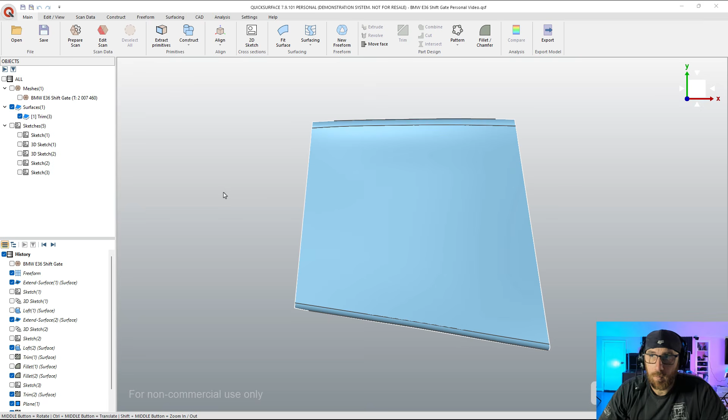The intent here for the user is to redesign a part that's no longer available for 3D printing. So we're going to focus our attention solely on the general shape, as well as this middle piece. The main reason I want to focus on that is because there are some challenges associated with it.

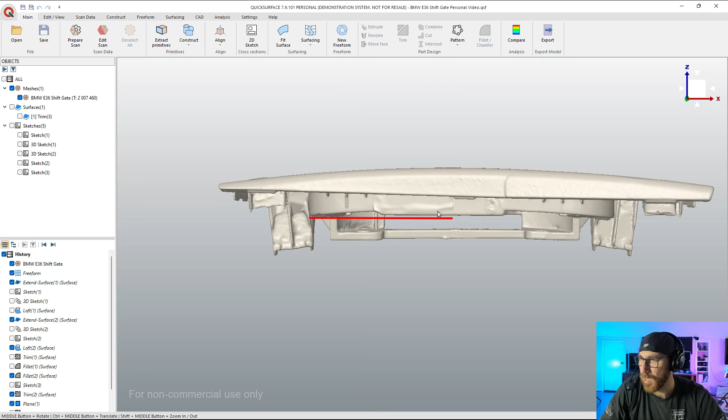This section here, where the two bolt holes are, that's actually fairly flat. But this other section, it's kind of hard to tell - this section is flat or planar, while this section right here is actually curved, except for this little bump out right here.

I want to talk about how to go about this, keeping in mind that this part is injection molded, so it has draft on everything. We're not going to be following draft because it's designed for 3D printing, or that's the intent here.

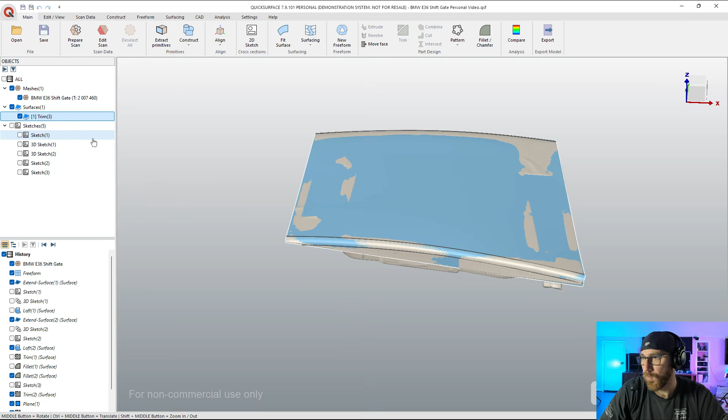So what we're going to do is take the surface we created in the first video, which is an approximation of the geometry. There are some areas where I didn't stick true to the shape.

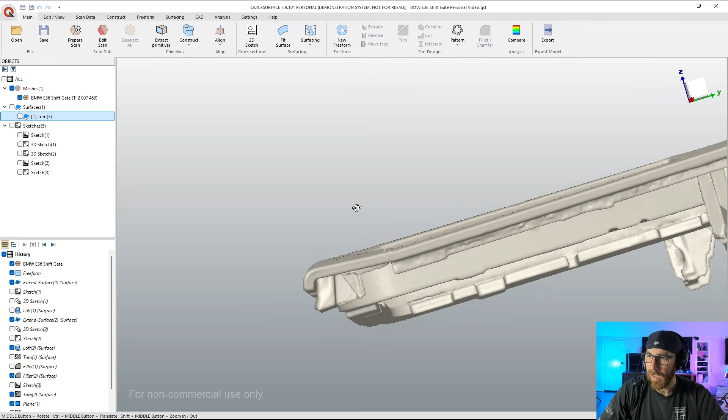For example, if you look here on this side, it's a fairly consistent shape on the edge where the shifter boot goes, but this section right here has a bit more of a compound curve. To get this accurately, we would need to go back into the freeform model, divide it up more, and pull it down into those areas.

You can certainly spend more time getting it more accurate. For our purposes, I don't feel like that's really needed - it's close enough for what we need to do.

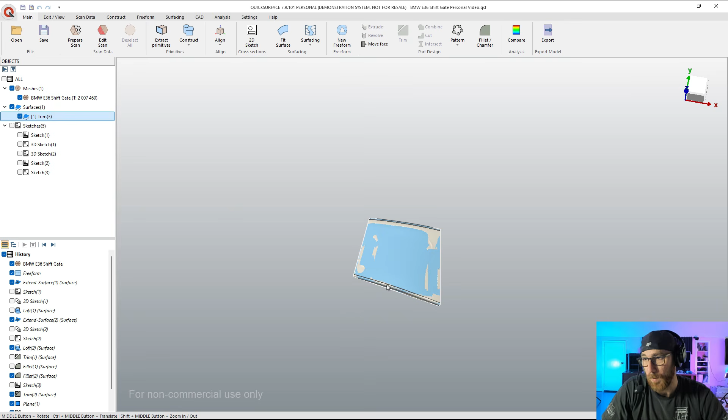The next step in this process, when trying to figure out how to design a part to replace this, we always have to keep the manufacture method in mind, because designing for injection molding is very different than designing for 3D printing.

There are going to be restrictions depending on the type of 3D printing. If this is FDM, for example, then we have to worry about supports. If it's like an SLS process, or essentially a self-supporting process where we don't need to worry about supports, that gives us a bit more freedom.

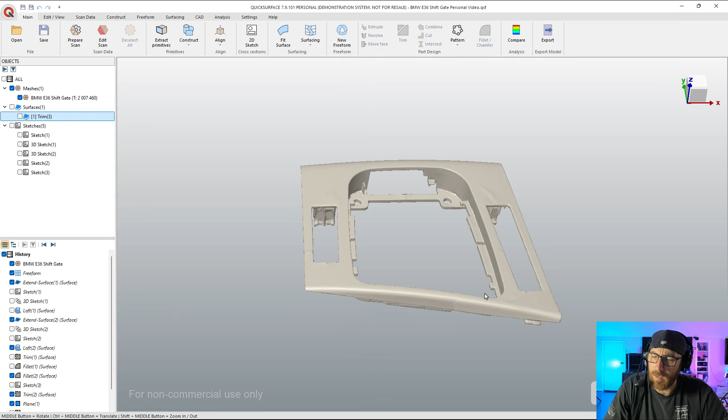If it's a liquid-based process, an SLA process, we do have to worry about supports and removal, but that's a bit different and not something we're really going to design a part like this for, mainly because that requires having vertical supports that hang it at an angle, and a lot of that's done in the slicer.

So what we're going to focus our attention on is the geometry, keeping in mind that it is for 3D printing, but there are nuances there that you need to keep in mind.

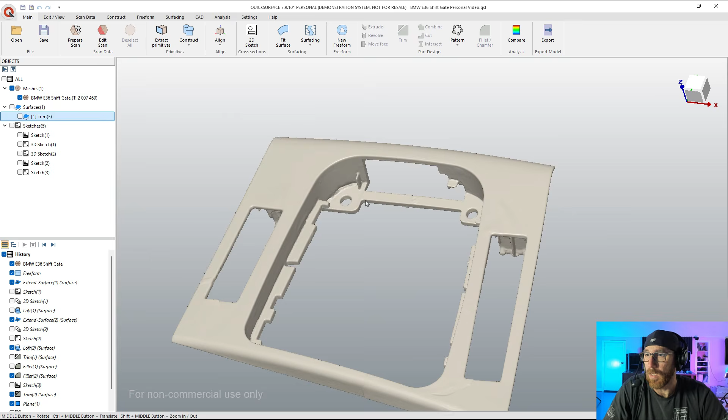In QuickSurface Personal, there are a couple of approaches we could take here. One approach would be to try something like a fit surface. For example, if we use the magic wand to grab the geometry here and create a fit surface, in some instances you'll notice it created this sort of big bubble shape.

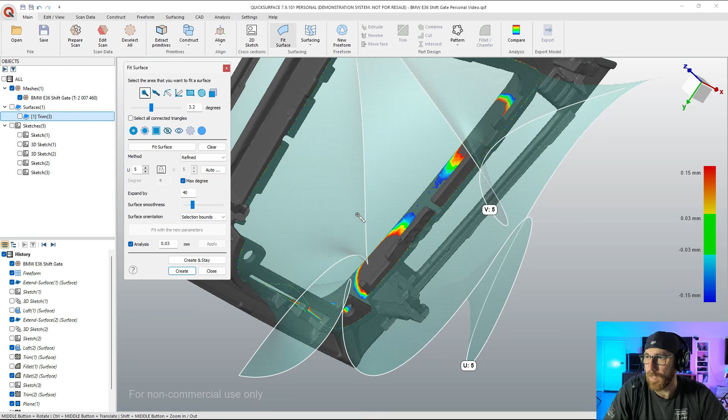What we'd be interested in is the area - let's turn on analysis - where it touches the geometry. You can see it touches in a few places. It's not super accurate, but this is one approach we can take. Sometimes it works, sometimes it doesn't.

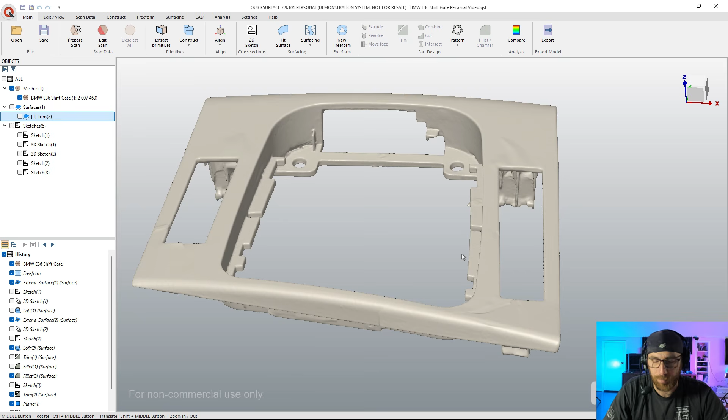The second thing we could do is, if this is truly a prismatic type shape, we could simply go with creating the shape from this top-down view and extruding it to get our shape that way. So that's another way we could do it.

Typically what we would do is use a 2D sketch, pull this up until it's cutting through the geometry - find a position where it's cutting through everything, so maybe somewhere around there. And then we could extrapolate from there.

So what I'm going to do in this video is approach it both ways, just so that we have the information.

So that way we can talk about it.

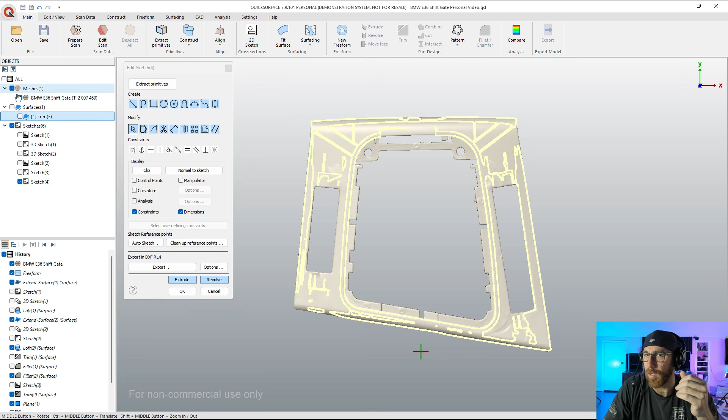So this first way, if we're trying to do an extrude, keep in mind that the actual part is molded and drafted, so we're not going to exactly replicate that. We have to make some design decisions. If it's drafted in an extreme manner, textured with 5 degrees or more, we have to shoot for the middle and decide where we want to go.

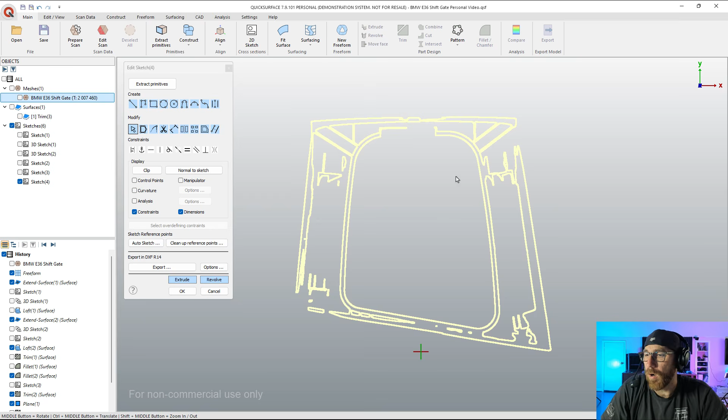For our purposes, what I'm going to do is grab the inside edge, not the outside, just because there's not a whole lot of data. We've got these little mount pieces and things like that.

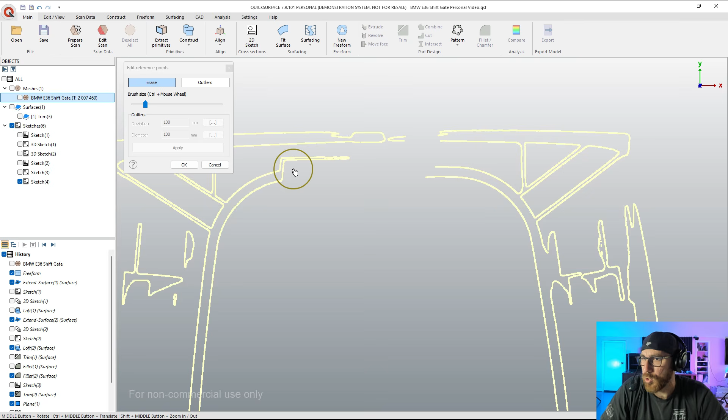So the way we're going to start this is to clean up reference points. This allows us to come in and clear out some of this geometry, which makes the selection process easier, especially if you're using something like Pro, where you've got Sketch Assist, essentially an auto sketch tool. This can be really helpful to clean up the selection process.

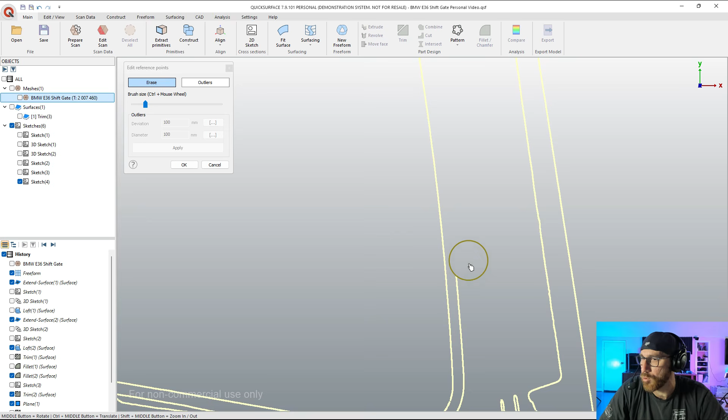Because when we're trying to select this to extract some geometry, we don't really have a great way — well, I shouldn't say we don't have a great way, but it's not as easy to move and pan around the screen and just keep the stuff that we want.

So oftentimes you have to hold down a shortcut key to temporarily disable the selection process, and then if you're also holding down Shift and Control to pan the view to an area where you can get to the rest of the geometry, it becomes a much bigger challenge. I think it's harder to manipulate and manage.

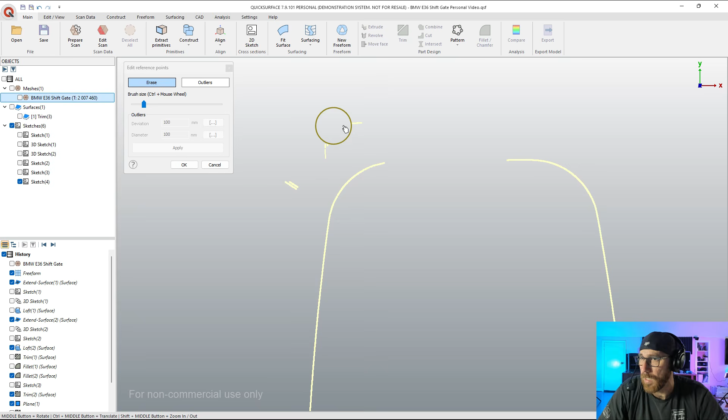So what I like to do, if I know that I only need a certain section, is come in and do this cleanup first. I'll say okay, and this leaves me with just the part that I want.

The next thing we can do is extract primitives. For example, you can say fit curve, and select everything we have left and have it apply a curve. Depending on your requirements, you may find that you want to adjust the tolerance.

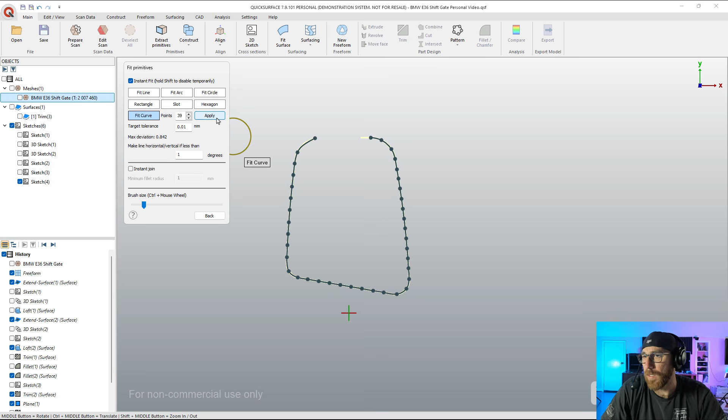So for example, instead of 0.1, maybe we say 0.01 and reapply this, or we increase the number of points. You do have the ability to tweak and toggle these around to get a result that works for you. Keep in mind it's going to be an average, or a deviation based on these tolerance values. So what you want to do, I'm going to go ahead and go back.

I'm going to say Control Z to undo, and do this one more time. This time I'm going to kick the number of points up. Generally, we don't want to do this — the more points we have, the worse the curve is going to be.

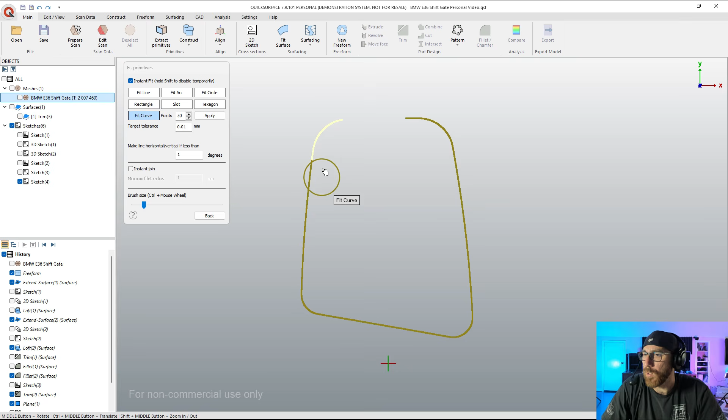The reason for that is because generally, if you can create a shape with, let's say, a 3-point arc, it's going to be better curvature than if you create it with a curve or spline that has 30 points. So what we can see here is that we're going kind of inside, then outside, then inside, then outside, based on the number of points and tolerance.

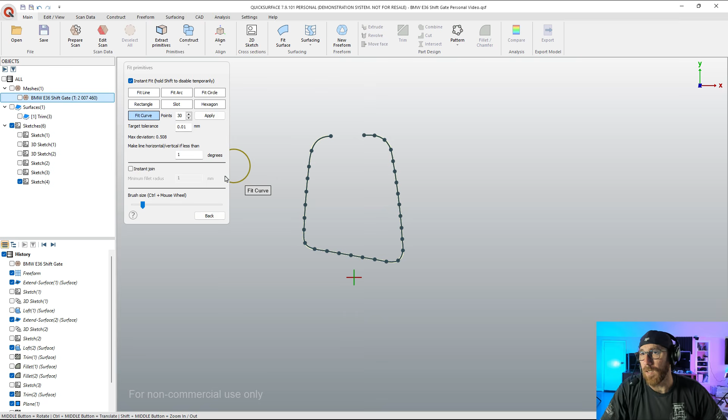So what I would generally do is try it — if it works, it works. For a part like this, when you think back to how it would have been designed, generally it would have been designed with arcs, potentially straight lines.

So for example, if we grab the straight line here and hold down Control to snap, if I snap from here to here, you can see that's a straight line. So if we're trying to use a fit curve going around that corner and trying to get it to fit in there, we're never going to get a perfect straight line out of it.

The stuff on the side is not straight — you can see there is some curvature here. So this would typically, if I look at this and I was designing it from scratch, what I would typically do is go with a 3-point arc.

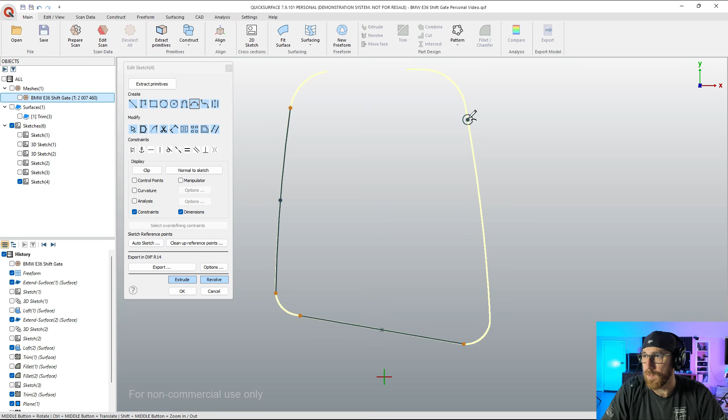The curvature is going to be much better. Again, holding down Control, allowing it to snap. You can see that looks pretty good. Same thing over here. And the reason the places I'm snapping are going to be essentially the start, end, and the middle of a curve. So imagine this was a fillet and these were extended out. Then that's kind of how we would approach it.

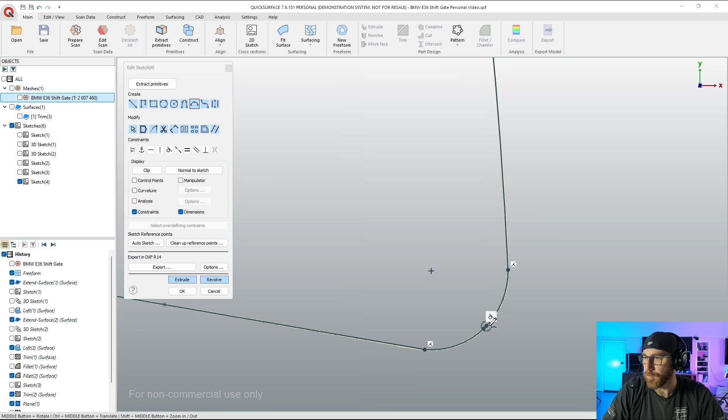Now what I'm going to do is add a curve here, again holding down Control. It doesn't have tangency in the corners. We'll fix that in a minute.

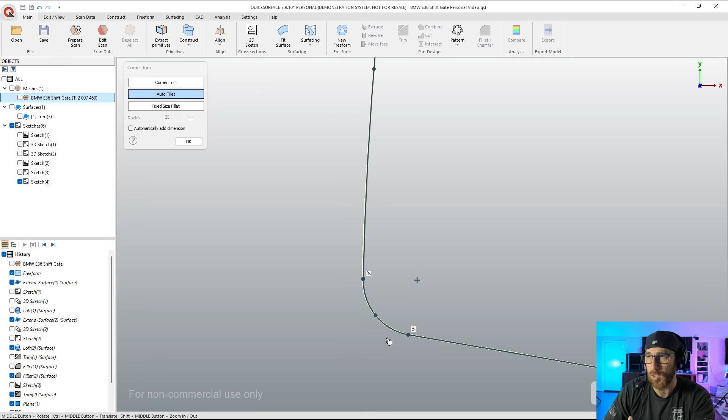For this other side, what I'm going to do is use this corner trim, and I'm going to do an auto fillet, and just drag around these. What this is going to do is automatically extend those two edges out. It'll apply a fillet based on the mesh section that we have, and then it'll keep tangency with those two intersections.

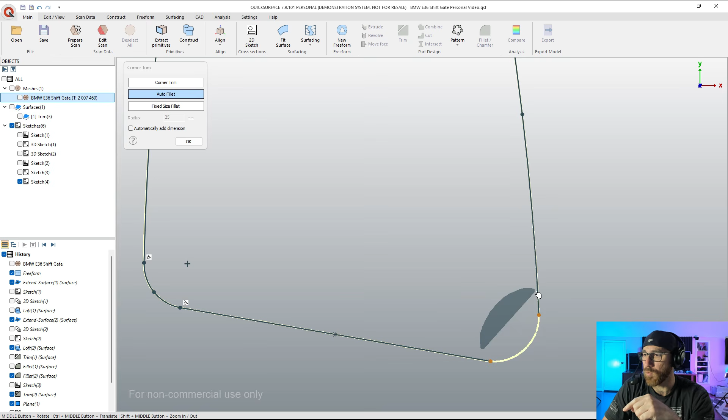So this is a much better way to do it if you've got a good reference. I'm going to say okay, go back to my cursor, delete that, and we're going to repeat that over here. Again, auto fillet, which is going to be based on the mesh reference. Select those, and it does a pretty good job. We've got tangency, it's going to snap to the middle, and we've got a pretty good result.

Over here, this is a bit different because we don't have anything connecting the middle, so we have to make an assumption. If I bring the mesh back, it looks like it's a straight line. So if I go from, let's say, here to that, the arc is probably coming out somewhere here. It may not be perfectly horizontal based on the orientation of the sketch. I would just have to assume where that arc's going to end. It's probably somewhere around here. And if I zoom in, maybe, let's say, probably like that.

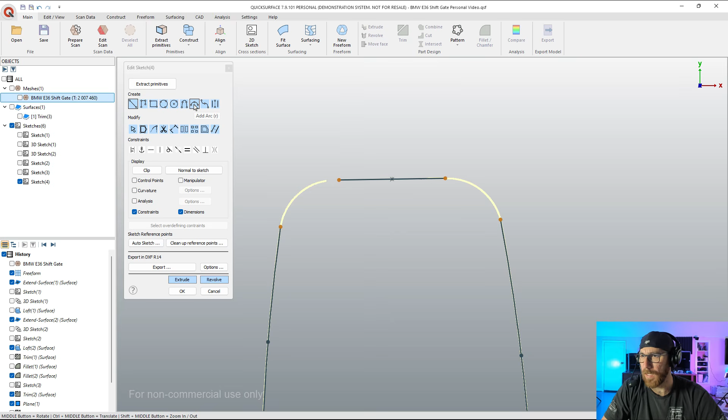All right, so the next thing I can do, again, we can use the extension option. If I grab these, it'll do a good job. I can go over here, get it to do that, and I'll say okay.

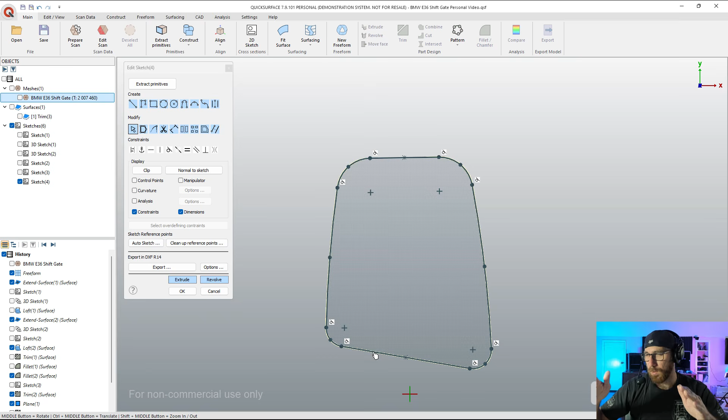All right, so that's the way that I would go about extracting this geometry. Again, you can use extract primitives, and in many cases it works okay. Since this had visually a combination of straight lines on the top and bottom, and what looked to be large arcs on the side and consistent arcs on the corners, it makes more sense for me to do this somewhat manually to get it close. Now, I'm not going to have the option, when we go to extract primitives, of a tolerance, saying you're within 0.5 millimeters or 1 millimeter or whatever. We're not going to have that here, just based on the way that we did this, but this is going to give us a pretty nice option.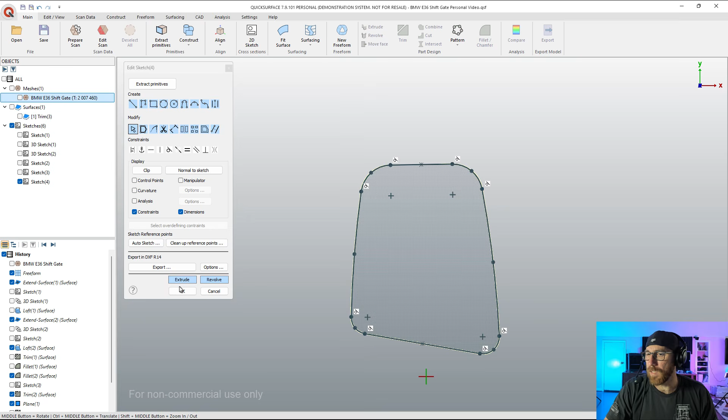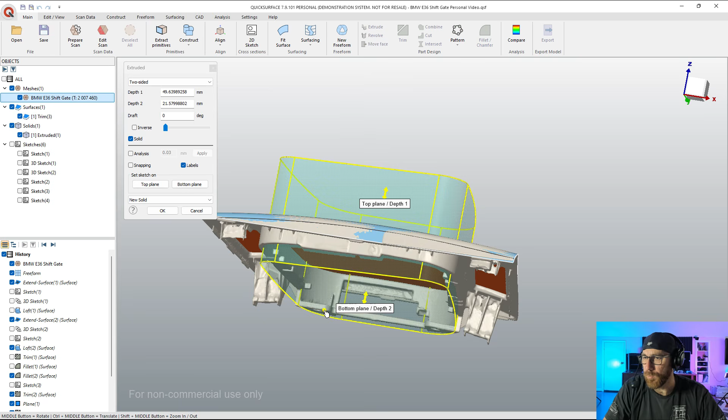From here, what I would generally do is extrude this. Now, this is going to get a little tricky, for a few reasons, simply based on the fact that we need to do some more manipulation to the geometry. So if I pull this down, I'm going to hold Control, it will allow me to snap to geometry. This might be better if I rotate it this way. So if I pull this down and hold Control, it gives me this snap option. You can kind of see I'm moving the cursor point around.

One thing you're going to notice is it's not planar. This mounting face is actually at an angle relative to the direction that we're extruding, so snapping to geometry isn't going to really work here. So what I'm going to do is pull this up so it's larger. I don't need that much on the top.

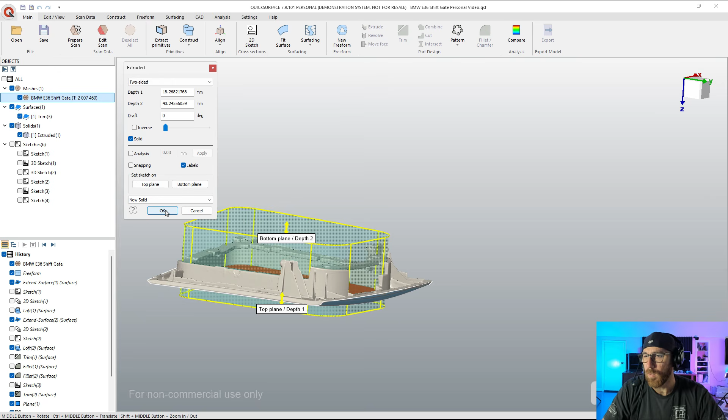And then we want to do this either as a new solid or a surface. So if we click on or deselect the solid option, what we're going to get is an open surface. If we leave it, it's going to be a solid. We can actually still use solid for trimming, it'll treat it as independent surfaces. So I'm going to say okay for that. And the main reason that I like to do this for this example is because now we can create planes to trim some of this stuff, keeping in mind that this is representing the inside.

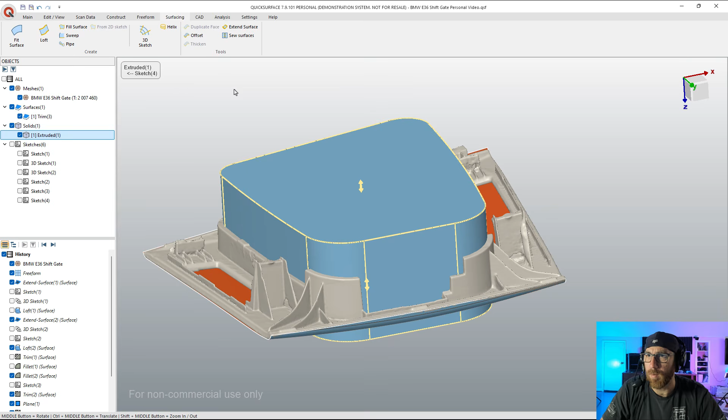So what we need to do is actually offset it the correct amount. Now, the correct amount is going to be a little bit tricky, but there are some cool tools inside of QuickSurface that will help with that. So I'm going to select the entire body, and I want to offset it. I'm going to start to drag this out.

Let's go the other way. As I start to drag this out, you can see that it's growing and starting to overlap right about there. There is an analysis option, which is pretty handy, and this will give us a good indication about where we're crossing through that mesh.

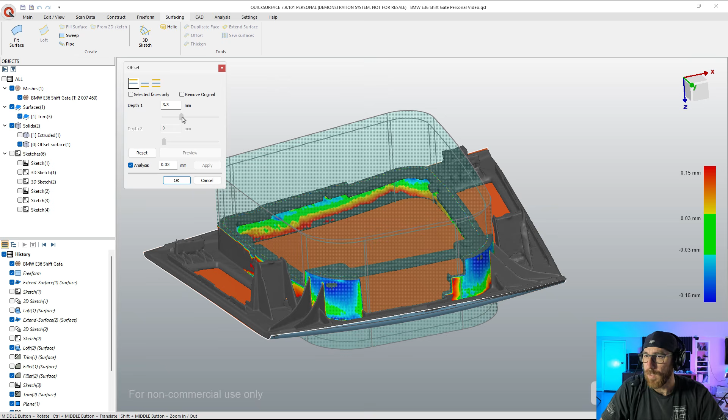Now remember, I already said this is a tapered part. It's injection molded, so if we're designing this for 3D printing, what we really want to look at is the inside. This is pretty good on this corner here. Let's rotate this around where we can see it. It's pretty good on this corner, pretty good here for the most part. It gets red on that section, but we've got a lot of green, and that's really what I'm looking for.

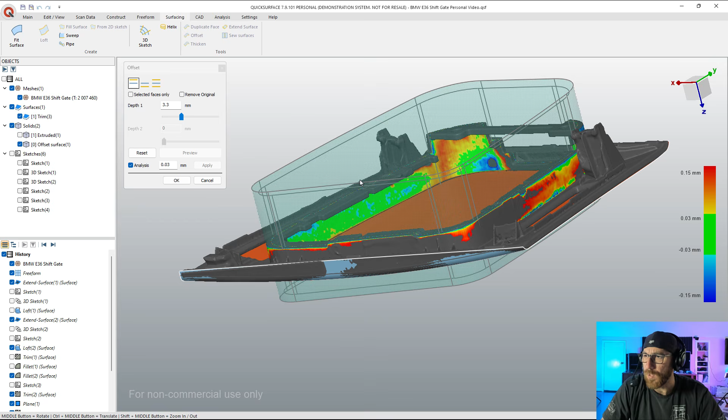The stuff in the middle is different because this bumps out slightly, likely due to the way it was molded. Obviously there's little features around here, so we're not going to hit all of this stuff, but I'm looking for essentially an average where I'm going to get close enough. So I'm going to say okay to that.

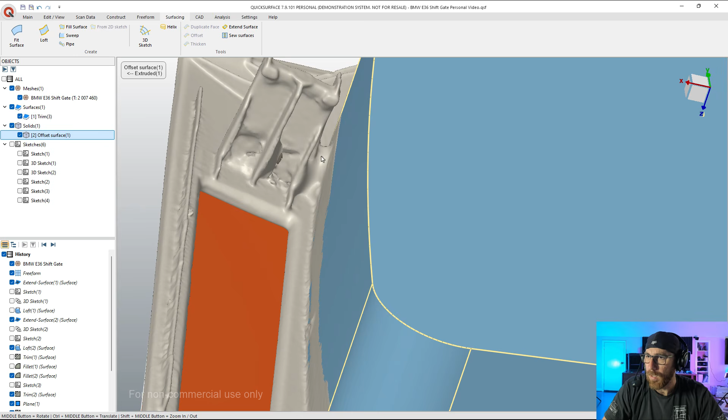Looks like 3.3 millimeters. Now what we have is a solid on the outside, basically offset outward. So we're able to extract the geometry from the inside edge, which had fewer features on it. We didn't have these ribs here, and we didn't have some of these mounting tabs that were intersecting with it. So it gave us a nice clean internal edge that we could pull that curvature from.

And then we use the outside just by offsetting it to the right amount. And it looks pretty close to me. It may not be perfect, but it's pretty close.

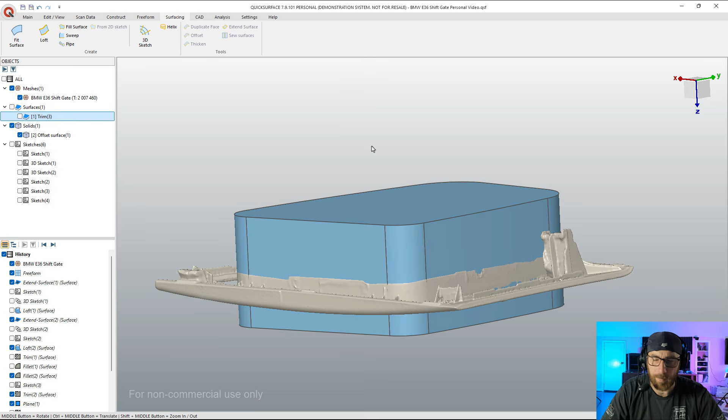The next thing to do from here, I'm going to hide the surface for now because we don't really need it. I'm going to go ahead and save it because I haven't saved in a while. But the next thing I need to do is start trimming away or reducing the shape of this on the inside to match the mesh.

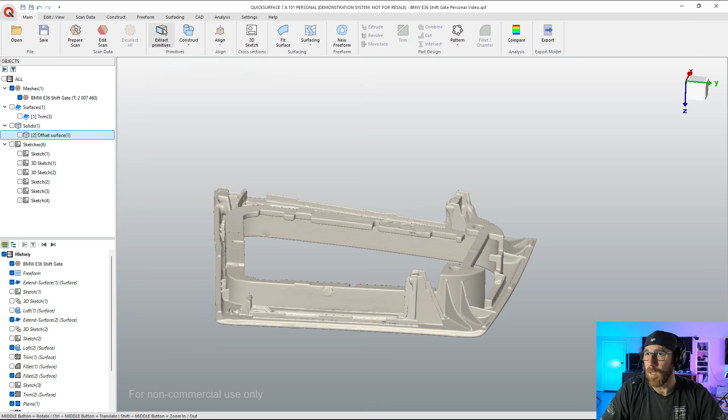The first thing I'm going to do is go to my main tab, or you can go to construct. We're going to extract a primitive from this face, a plane, look at analysis, and we can see that we've got a plane that's at an angle relative to the rest of the geometry, if we look at it from the side. This looks fairly horizontal here, but this is obviously at an angle.

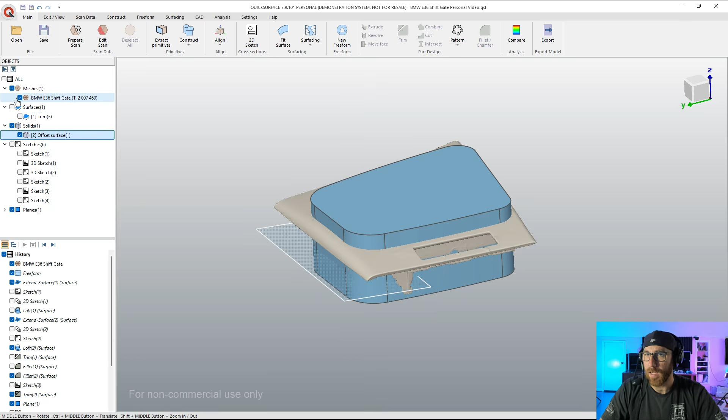So what we're going to do is create that. We're going to bring the solid back. I'm going to hide the mesh for now, but we're going to select this surface here, or the solid I should say—it says offset surface—and then control select the plane.

And then we're going to use trim. So when we do trim, notice something happens here—it doesn't work based on our selection. So I'm going to hit cancel. And with this, I'm going to increase the size of this, stretch it out a little bit, and make sure that I have both selected.

This is what I find to be a little tricky. Sometimes when you have something highlighted, it's not actually selected. But if you pay attention to what you see on the screen, you should see yellow highlights on all the edges. Now, once I have both of those and I hit trim, it looks like everything's okay.

So I'm going to trim away the outside of this surface and trim away the bottom of the box. And then let's see what we're left with. It's got this sort of inside edge, but I'm going to go from there.

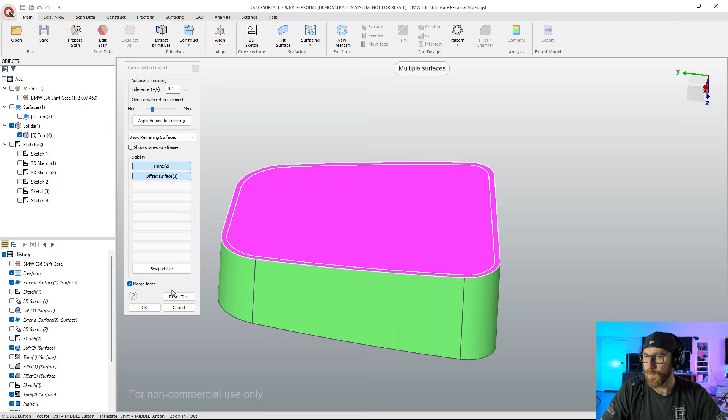Okay, it looks like it failed. Why did it fail? I know why it failed. When we did the offset, it still has the stuff on the inside. So let's delete that. Yes, I want to delete it.

Let's try this again. So, plane, this, trim, get rid of the bottom. You can see it's still keeping that inside that we had there. So what this is telling me is that when I offset, I didn't use the option to remove the original, and I should have. So looking at this, before I go any further, I'm going to hit cancel.

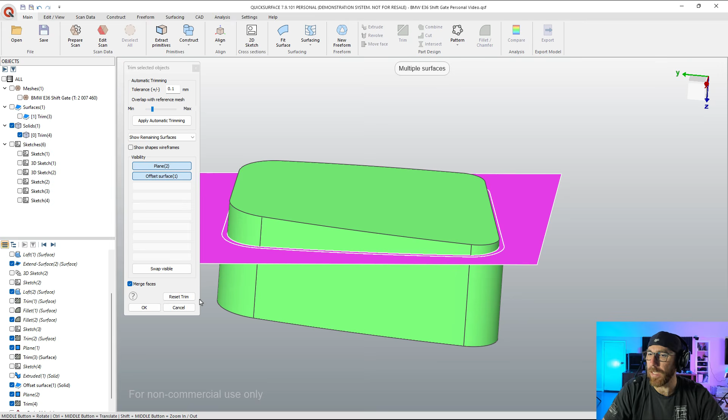I'm going to go back to that offset surface and click remove original and say okay. So now when I go to my planes and go to my offset surface and trim, I shouldn't see the inside anymore. Yeah, that's much better. That checkbox should probably be on by default, simply because it still treats it as one solid body.

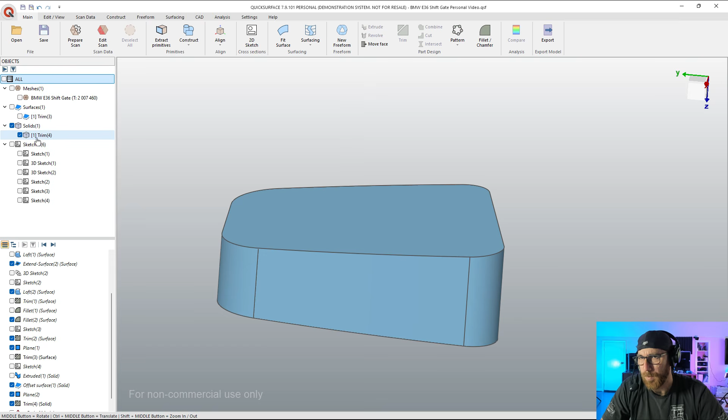But if you just go back, you can re-edit that feature and turn it back on. So now if we bring back the mesh, this should be close to that mounting tab. You can see right there. The other thing that we need to do, however, if we hide the solid, is deal with the rest of this. And the rest of this is actually, I think, curved.

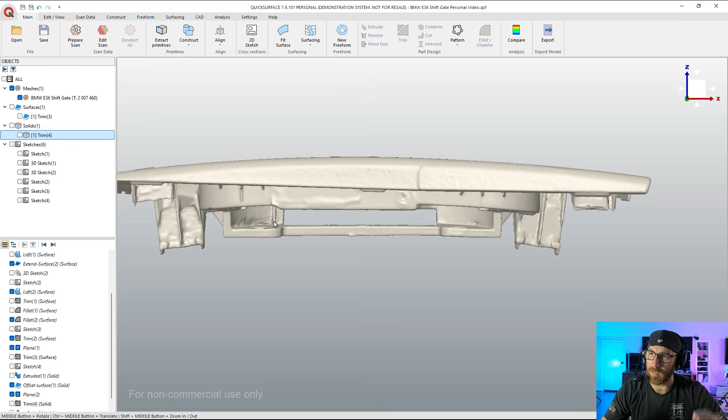So what we're going to do is a 2D sketch. I'm going to pick the XZ plane, rotate this around, pull this so that it's somewhere in the middle, like that, and create it. The reason for that is because I think this is probably just a simple arc. So I'm going to hold down Control, go ahead over here, and create that arc so that it looks like it matches.

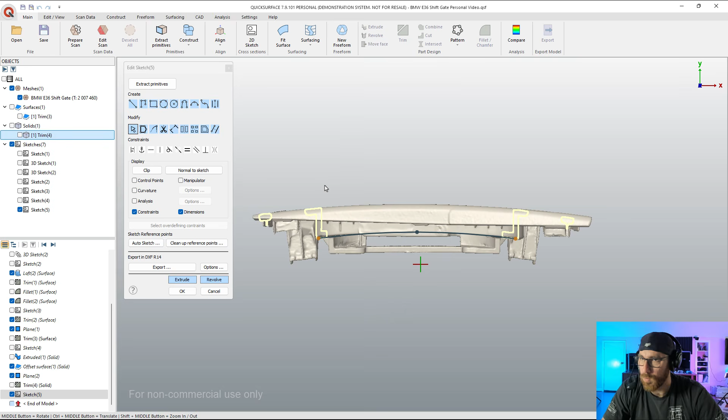All right, so now that we've got this arc, actually, you know, since I'm doing this all on the fly, anytime I'm messing around with this, I might decide to change or modify my approach. But what I'm going to do is pull this over. I'm going to take this and extend it out on both sides. Let's go ahead and just extend that out. And I'm going to create just a solid extrude cut.

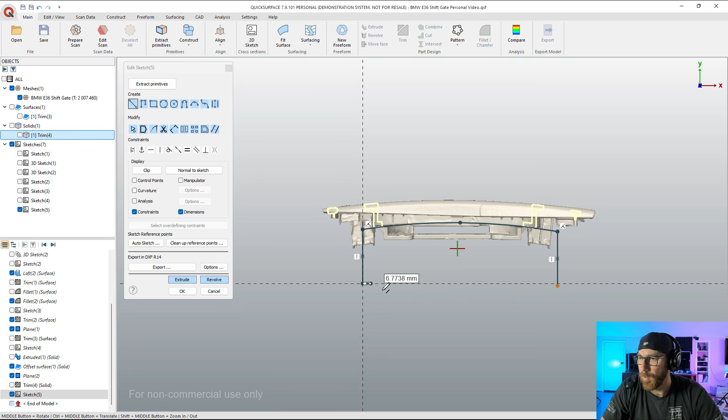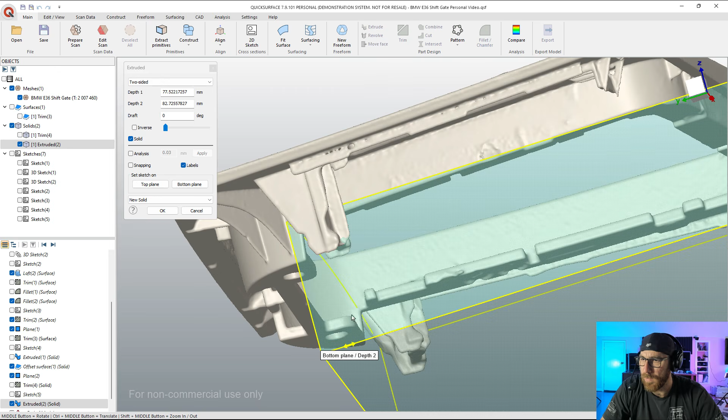So we're going to come down. I'm not going to pay close attention as long as I've got essentially a solid body here. All right, so I'm going to pull this all the way until essentially that tab. Now, what I could do is rotate this around. As I'm pulling, I can snap to geometry there. And again, this is drafted, so it's going to have taper on that wall. I don't really care about that, but I'm going to say okay.

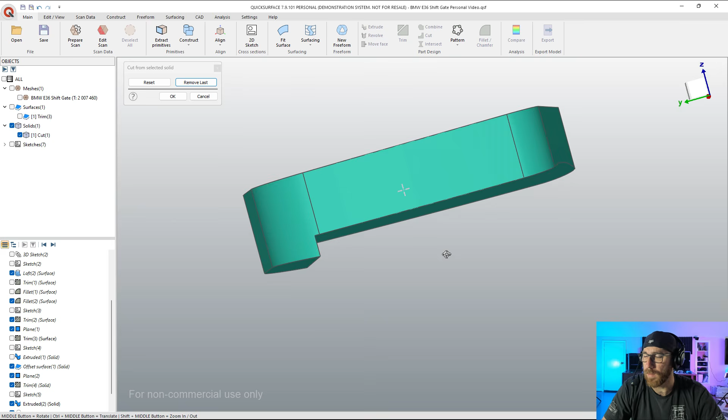And then I will hide the mesh and bring this back. So essentially now what we want to do is remove this body from this one. We're going to select the body that we want to keep. We've got this cut option, which removes material from the base using another solid. And if we click this, it'll use it as a Boolean cut operation.

And so now if we show the mesh, we should have something that is relatively close to these faces. You can kind of see what's going on there. And then we've got this little tab piece, again, that raises up. But for the most part, we can see a pretty good representation of where those mounting points are and where this face is. So now a couple of other things that we want to do is turn that surface into a solid on the top, and we want to shell it. But let's go ahead and save this, and then we can take a look at the next steps here.

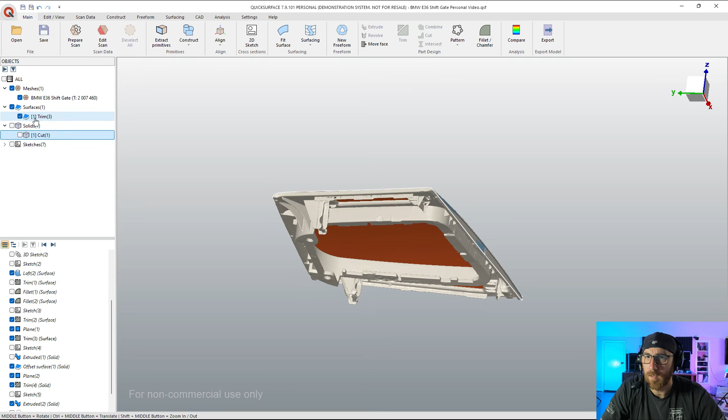All right, so I'm going to hide the solid, select my surface. I'm going to go to my surfacing tools. And what we want to do is thicken this. So we're going to go thicken. And once again, we want to turn analysis on.

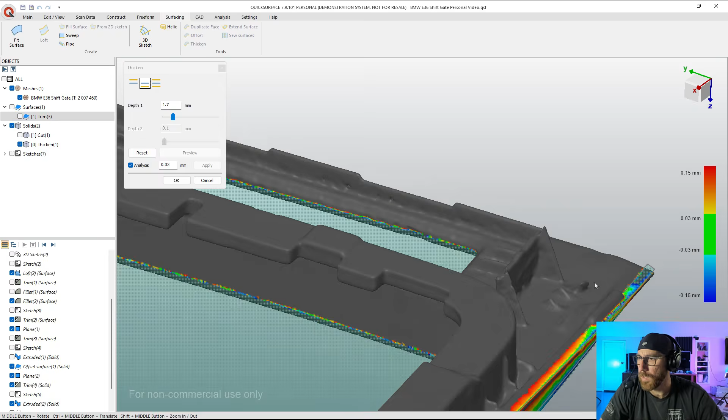And I'm going to start to drag this. Let's just pick an area like over here. Drag that up. And again, you're kind of watching in real time what the thickness is. So it looks like 3.7, 3.8.

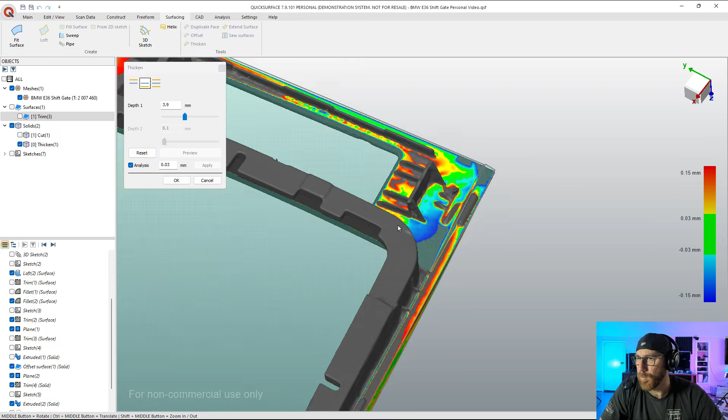Yeah, 3.8, 3.9 looks to be pretty good. You can see it's pretty good representation there. We got some green there, some color coming through there. So again, this is another tool that you can play around with. Let's go ahead and pull this up. Pretty good representation there. I'm going to say okay.

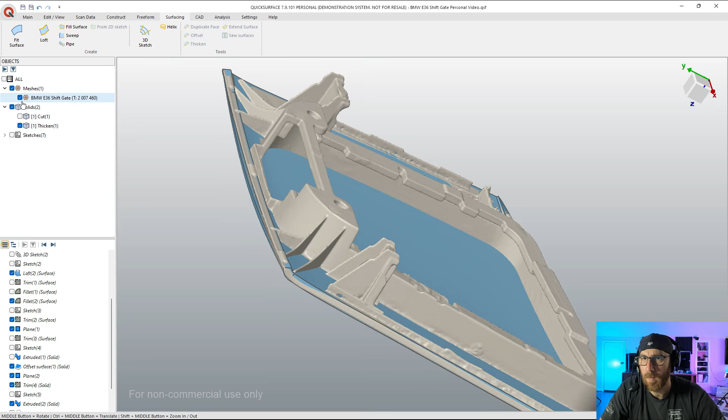And now we've got a solid body that is essentially the outside shape. I'm going to hide the mesh. And then we've got this solid body that's the inside shape.

All right, so next thing that we want to do is cut the top here. Now we could do this with the surface before, but in this case, let's try to do a trim. So I'm going to select both of these and say trim. I want to get rid of this top piece. Yeah, let's go ahead and leave the rest of it.

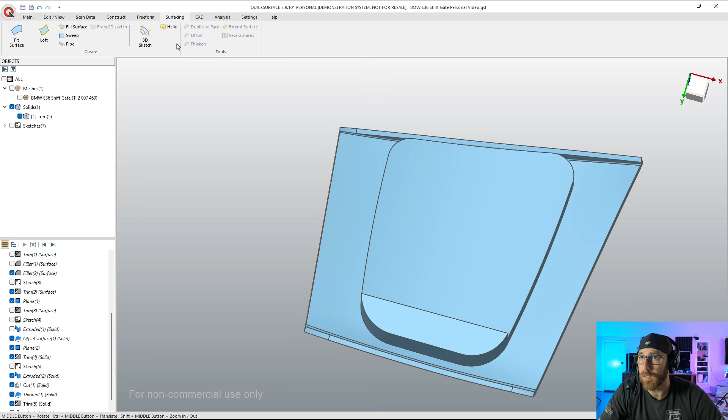All right, and then the last thing that we want to do is likely create a shell. So I'm going to select this. Actually, let's select this whole body. And let's try offset.

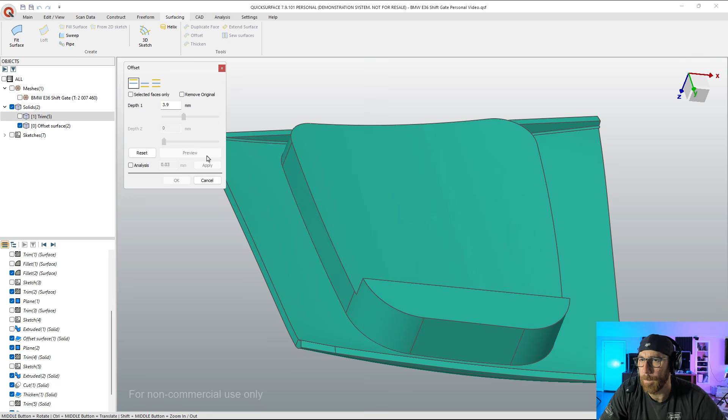So let's try 3.7. Actually, what do we do? 3.9? Let's try 3.9 and preview. Might be the wrong direction. Let's try the other one. All right, let's reset it. All right, it's thinking. Let's try this. 3.9 preview. Yeah, it doesn't like that.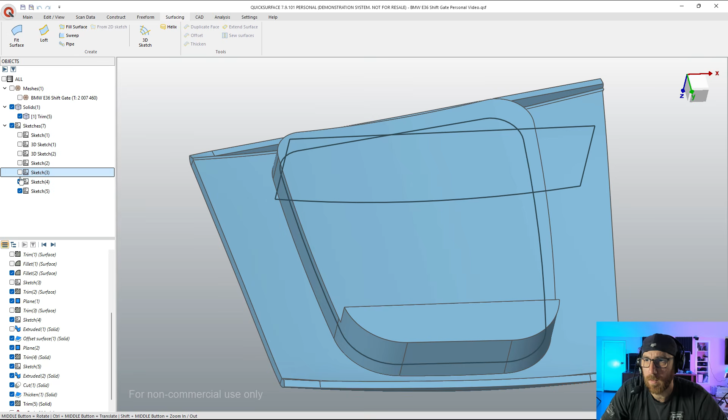Okay, no problem. This is actually pretty easy to deal with. So what we have is we still have our sketches. All right, so let's get rid of these. There's probably a good way to do it, but I might just be missing something. So we're going to take this sketch and we're going to extrude it.

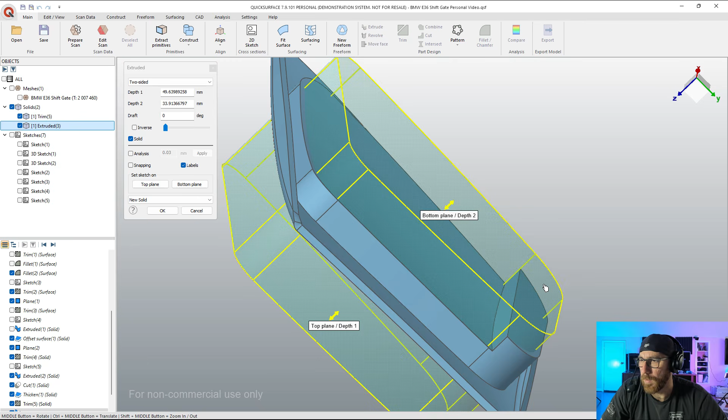So again, that can cut all the way through, but what I want to do is bring it up to here. And we're going to offset it 3.7 down. All right, so it's going to be a new solid. We're going to say okay, go to the side. And remember, we created that plane, but because the plane was used as a trim tool, it's actually gone now.

But what we can do is we can create another one. So we're going to extract a primitive. We're going to create a plane. And then inside of here, just make sure that it matches. It looks okay. We're going to create it.

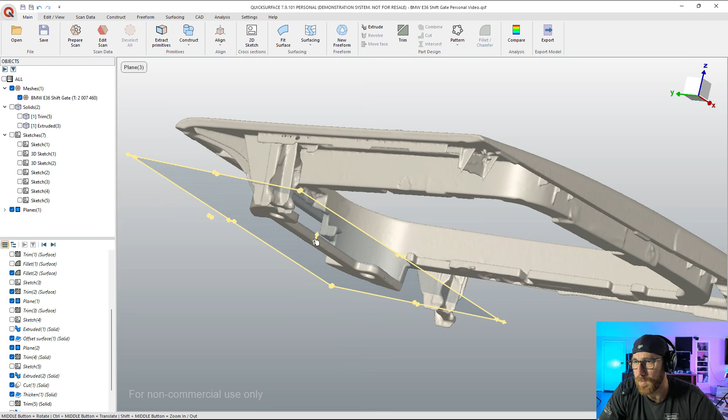And we can take this and we can actually offset it however much we need. So you can look at, again, the display here. You can snap, but I'm just going to do it visually for right now. And then kind of pull that over. So what this will allow us to do is use that to trim this solid.

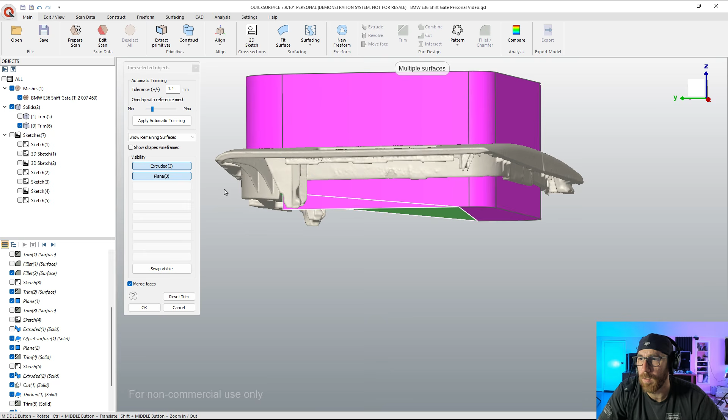Okay, so select both of them, select the plane, select the extrude. We'll use trim, get rid of that. That looks okay, say okay. And then we'll select the original. We'll say cut, select that body, and we'll say okay.

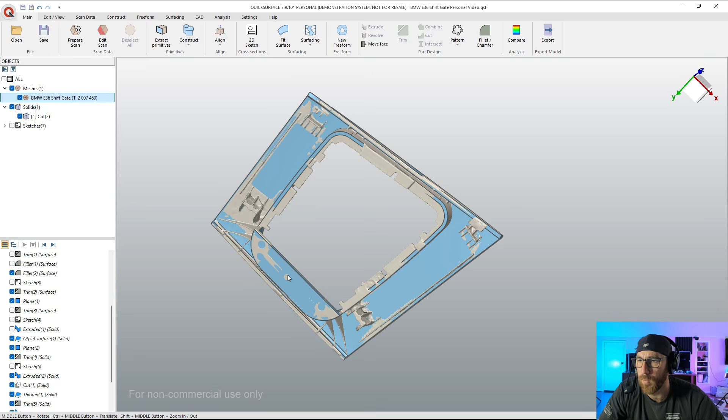All right, so if we bring back the mesh, you can see now you can remove a little bit more here. I'm not going to worry about that for our video. Again, we could play around with that cut tool and leave some of these tabs here, but again, you can always add them back if you need them. But this gives us a pretty good representation.

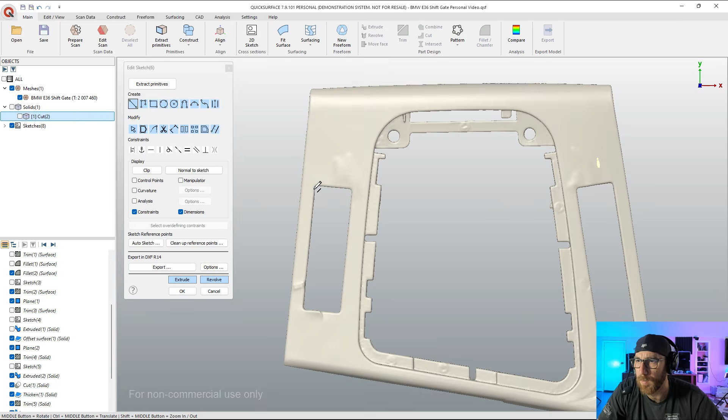Just probably one more thing I want to do is create another 2D sketch on the top, and I'm just going to create these cutouts here. I'm not going to worry about taper angles or anything like that, I'm not going to be that specific. Just going to kind of go here, there, and we'll do the same thing on this side. So just kind of pick your first point, go there, and we'll say extrude. So bring the other solid back and call this a cut, and we'll say OK.

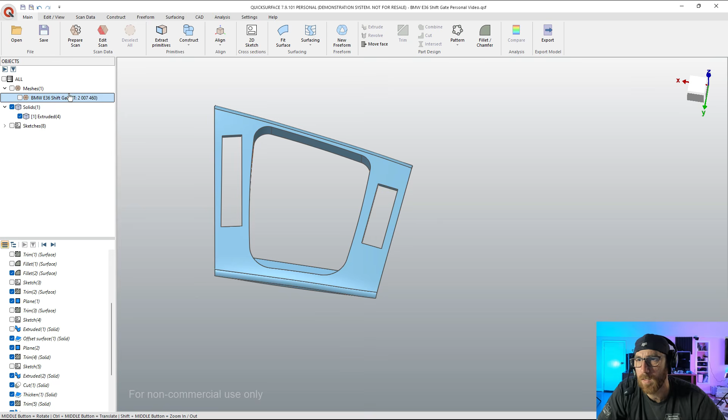So now if we hide the mesh, we now have a basic representation. Let's rotate it around this way. We now have a basic representation of the part. Of course, we can round corners off and add fillets. But if we look at the mesh, you can see we've got the openings where we need it for the switches and extra pieces. We have got a fairly good representation.

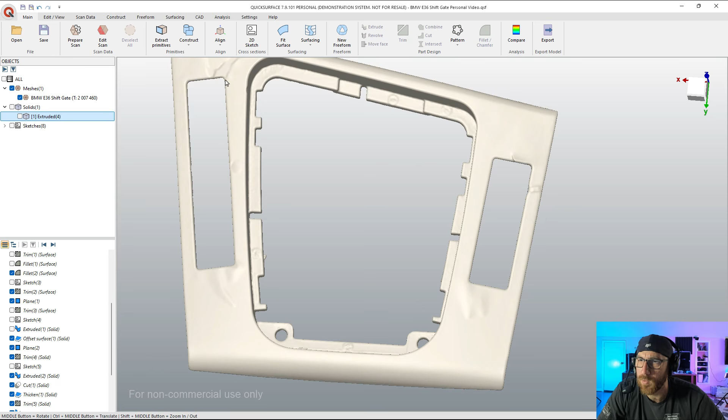Again, the mesh, the original part, a lot of times when you see areas like this where they're low or high, this could be surface finish issues with the original part. It could be shiny.

Sometimes if you've got a matte finish part and then you've got shiny areas, those shiny areas will show up as high or low spots, so sometimes those can be problems. But overall, I think this is a pretty good representation.

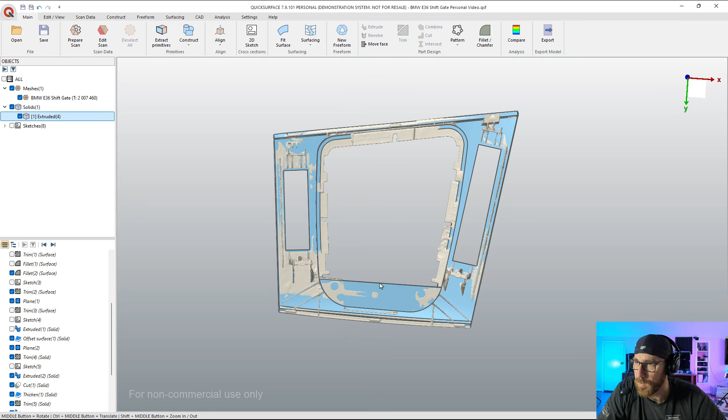Again, you can definitely spend more time getting it closer. Some more work could be done here to open these things up. But if you're designing a part for 3D printing, in this case a desktop FDM, you want to spend the time and replicate the outside shape as accurate as possible. All the inside stuff, because you're not constrained by things like injection mold draft angle or textures, you have a little bit more flexibility.

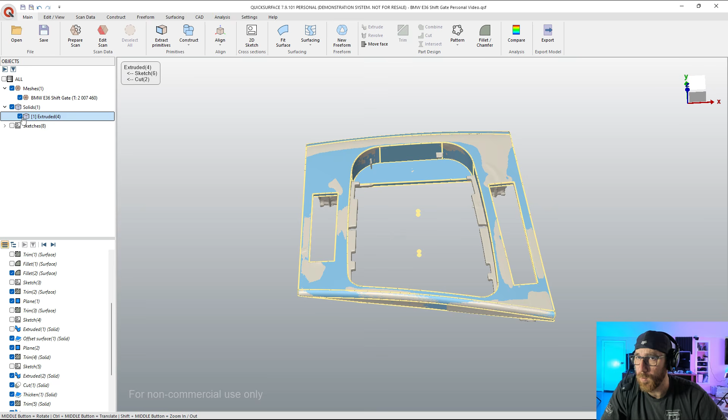So I would assume that this little slot here, these two slots, are going to be some sort of mounting hardware. Of course, on the back side we do have two mounting holes, pretty straightforward - that's some mounting hardware. And some of the additional tabs you see here are likely press fit into other trim panels or pieces, and those can be added however they need to.

You won't need to have the thin wall supports the same as you do for an injection molded part. You can put large fillets in the corners because we're not really concerned with things like consistent wall thickness. If it's an FDM part, you'll have to just play around with those features. So I'm going to go ahead and save this.

I know the first video ended up being about 30 minutes - 8 to 10 minutes was just talking about QuickSurface Personal. This video, about the same, we're looking at about 30 minutes. Hopefully that gives you a general idea of some of the tools and approaches we can use, not just in QuickSurface Personal, but in LITE or Pro.

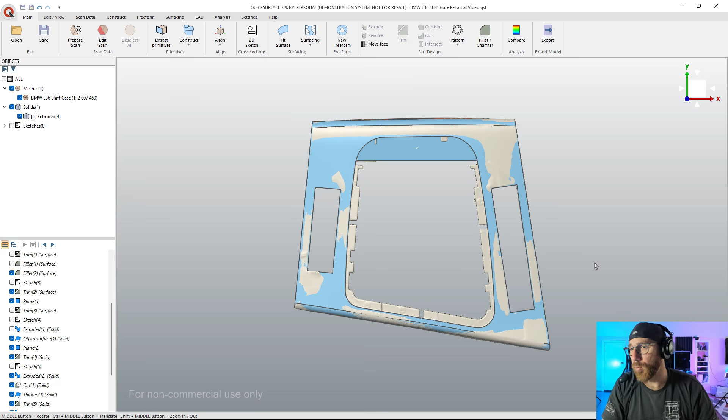Now, the approach I took for this part isn't necessarily how you'd approach every part. I did some things the way that I did them just to explore the tools. So if we look at this part in general: we created a freeform for the basic shape, we used both 2D and 3D sketches on the mesh to create other surfaces with the loft tool, we extruded solids, used trim and cut, and we extracted geometry, doing both manual extraction and extracting primitives or sketch curves from mesh sections. That's a whole host of tools, from 2D and 3D sketches to surfacing and freeform tools and basic CAD tools like extrudes, trims and cuts.

So that should give a pretty wide variety of tools needed to do parts like this. Now, if you have any questions on this or QuickSurface Personal or any of the QuickSurface versions, let me know.

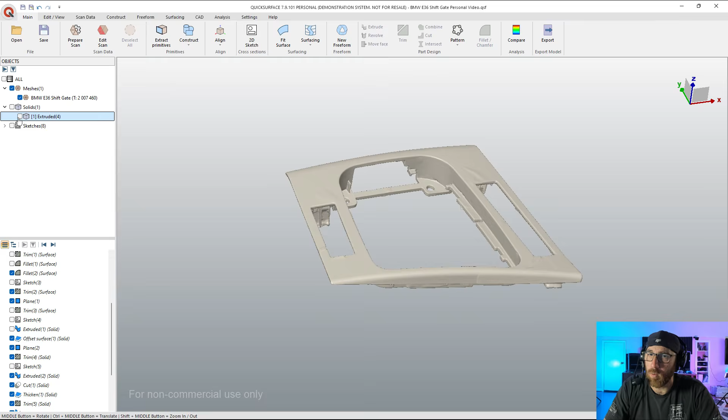And again, we are going to be doing this part in Fusion as well. We're going to approach that more as a freeform body completely. So, for example, in Fusion I'm going to talk more about how to get those rounded corners using the freeform tools. We'll talk about thickening the freeform model, and we'll do some basic Boolean stuff with solids and so on for the internal features. So the end goal is to have the same level of part that we have here in Fusion. We're going to approach it a different way, and you'll be able to see the difference.

And then if we get a lot of comments or I have the time, I will also approach some of this with Plasticity, because I do get some requests for scan-based designs in Plasticity. So if you want to see this in Plasticity - obviously we're going to do Fusion - but if you want to see it in Plasticity, leave a comment and let me know that as well.